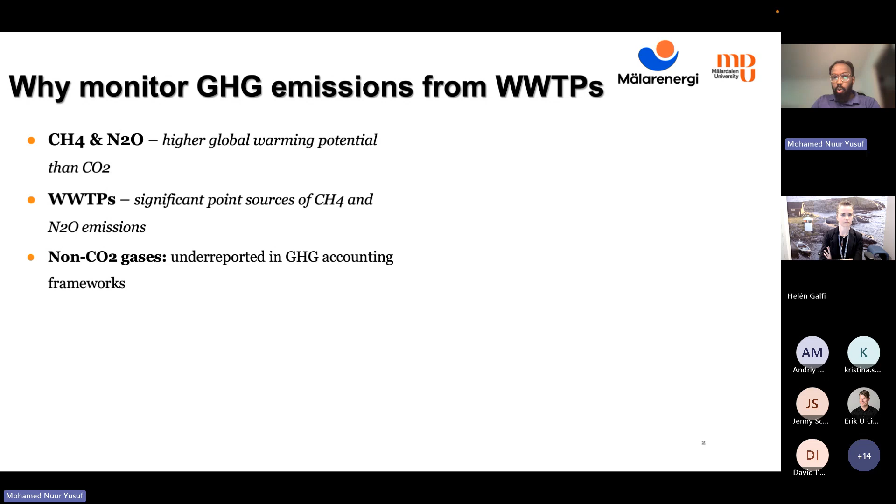And scientific reports show that wastewater treatment plants are significant point sources of these gases. And we also see that non-CO2 gases are underreported when it comes to scientific reports showing emissions of those gases in WWTPs. So reports also show that there's limited long-term measurement data available for WWTPs, and especially for Sweden, we see that methane and mostly nitrous oxide is not reported in the reportings, basically.

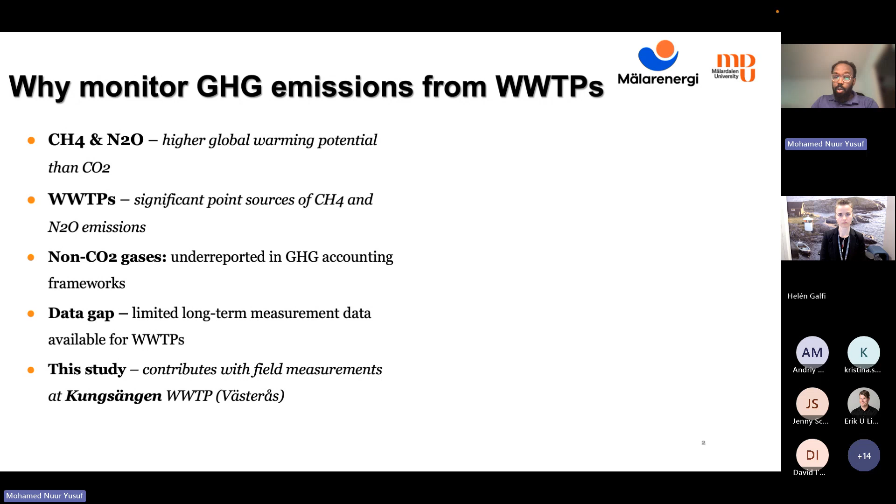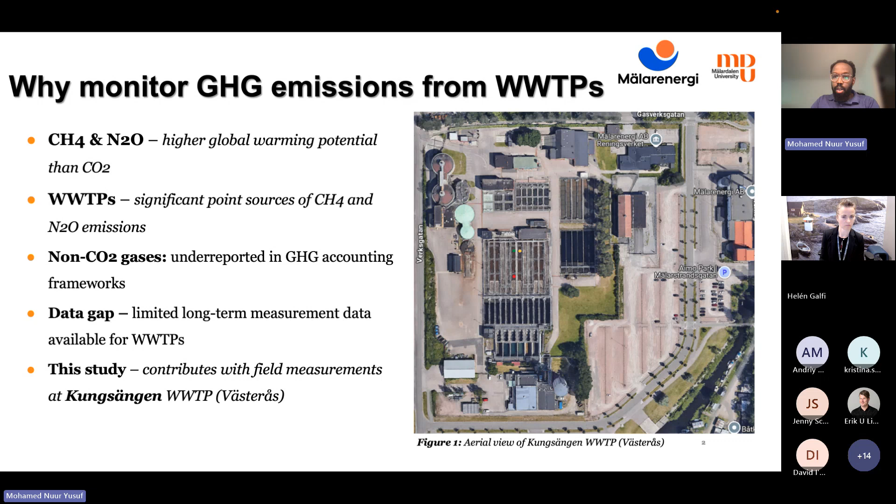So this study only focuses on Kungsängen WWTP here in Västerås. And this picture shows an aerial view of the field. Very hard to see in the picture, but there are some points that I colored here in red and green and yellow. These are the points where I measured the gas concentrations in my study. I will show a better picture later on.

So some of the measurement challenges included that we had an open air measurement, and this meant that it was sensitive to wind and rainfall. So for example, when there's a lot of wind, the measurement thing that we used would start going up and down, and there would be fluctuations in the reading data. And rainfall affected the actual analyzer that we were using, so we could not operate while raining.

There are some challenges when it comes to spatial variability. Different zones generate different emissions, but in this study we only focused on one part of the biological treatment process. There is some temporal variability with fluctuations and seasonal changes, but this study was only conducted during the summer months. And this is to mention, this is only the start of the project. It is planned that it will go on after the summer to see if seasonal changes actually show something.

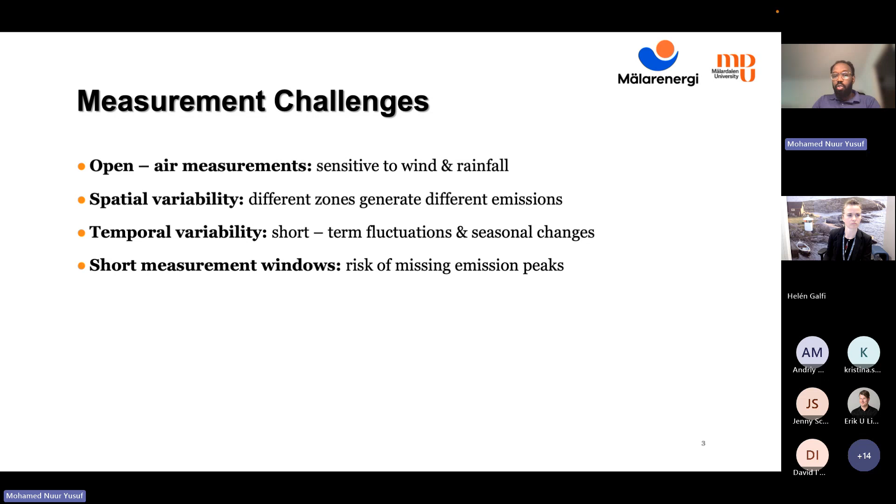So some of the challenges also include risk of missing emission peaks. The measurements that were conducted would only go from 20 minutes to 30 minutes, depending on rain and time availability. But to get the whole picture, it's important that longer measurement windows are conducted to see how peaks perform. And there could be environmental interference, as I mentioned before. There's also operational change, the pool movement, and so on. And currently there is no continuous plant level monitoring.

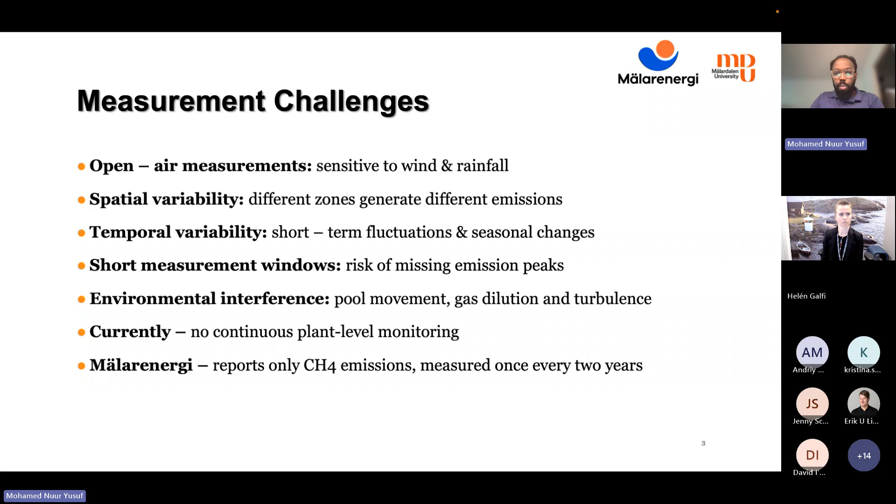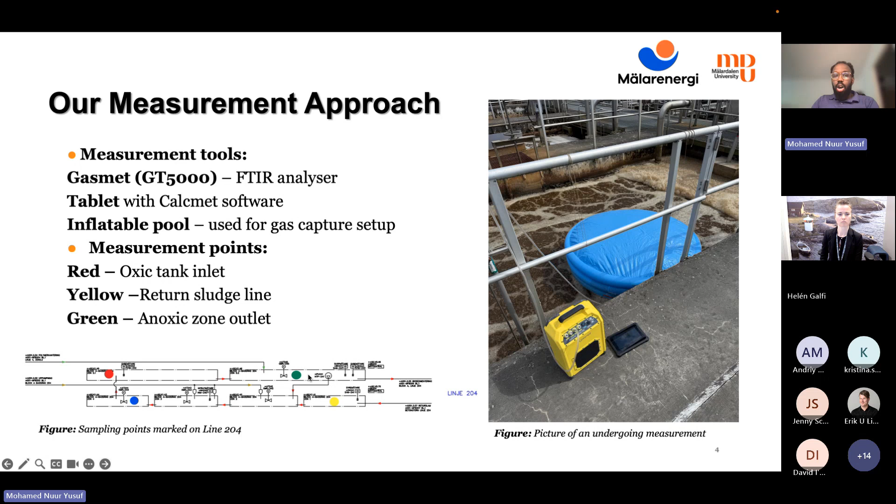So this is our measurement approach. The gas analyzer that we used is called GasMet, and it can analyze multiple gases. For our study, we measured methane and nitrous oxide. On the black screen right there is the tablet that we use to see the data, and the inflatable pool. You can see a tube going into it and into the gas analyzer, and that's how the measurements were done. The measurement points are the red, green and yellow points: oxic tank inlet, return sludge line, and anoxic zone outlet.

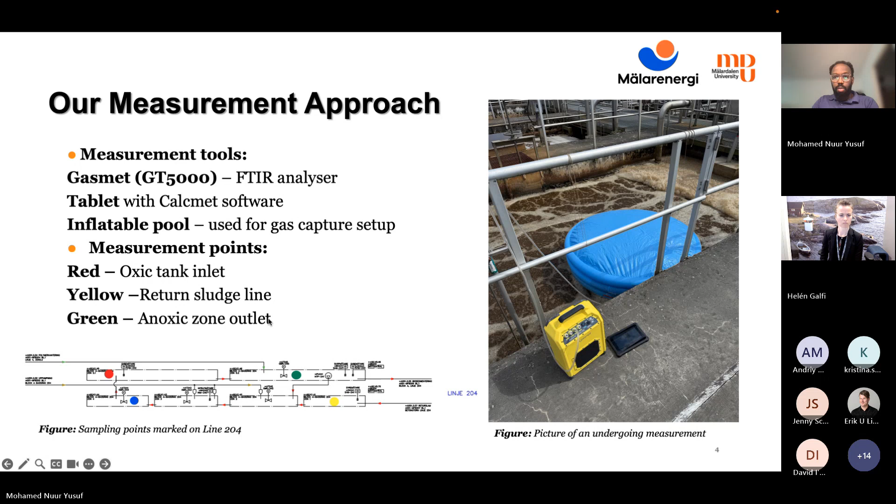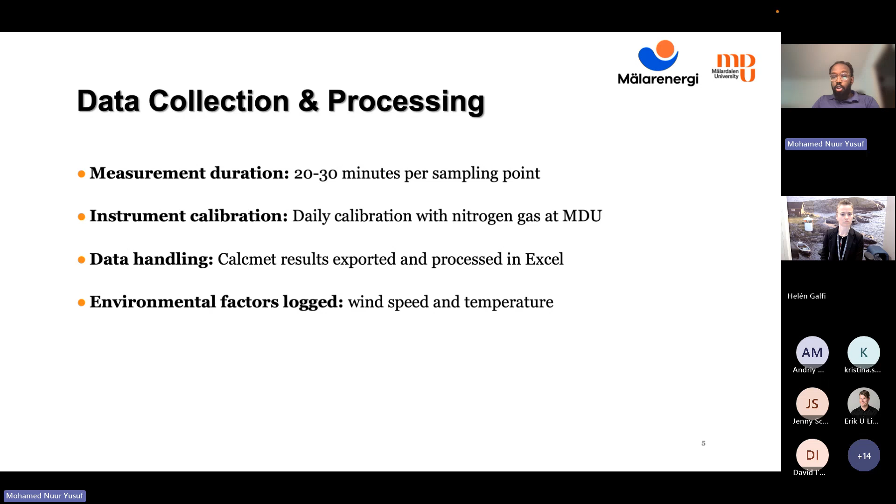If we move on to data collection and processing, the measurement duration was 20 to 30 minutes per sampling point. For the gas analyzer to work properly, it needed to be calibrated by flushing with nitrogen gas at MDU. To deal with the data, CalcMet results data, Excel was used to produce graphs and so on. And environmental factors were logged, wind speed and temperature, to see how these play a role in the data.

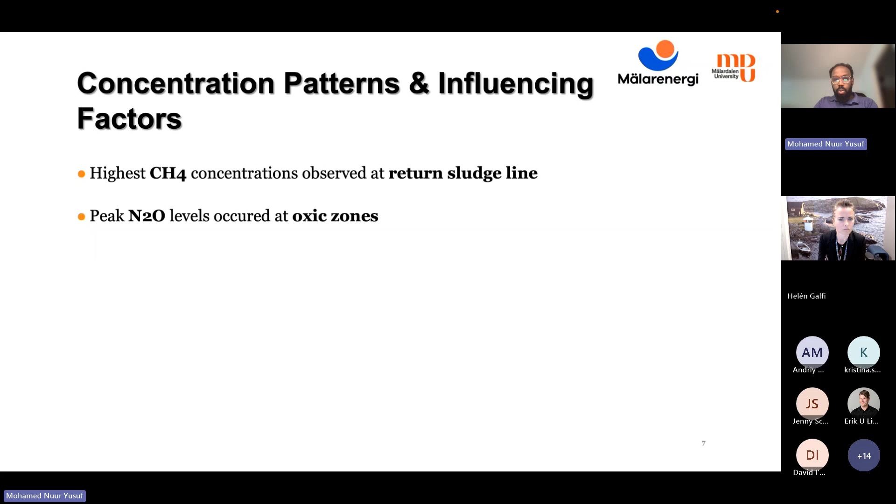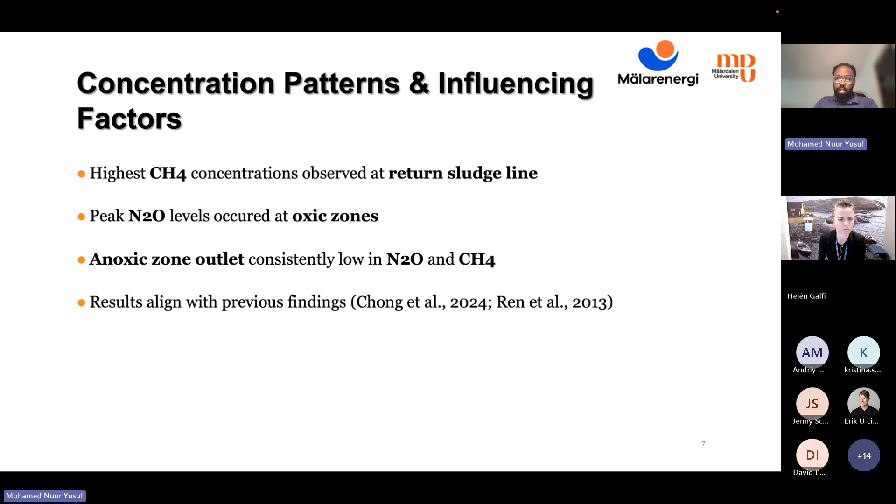So the concentration patterns show that the highest methane concentrations were at the return sludge, and peak nitrous oxide occurred at oxic zones. The anoxic zone outlet consistently showed low methane and nitrous oxide, and these results align with previous findings that showed these results also.

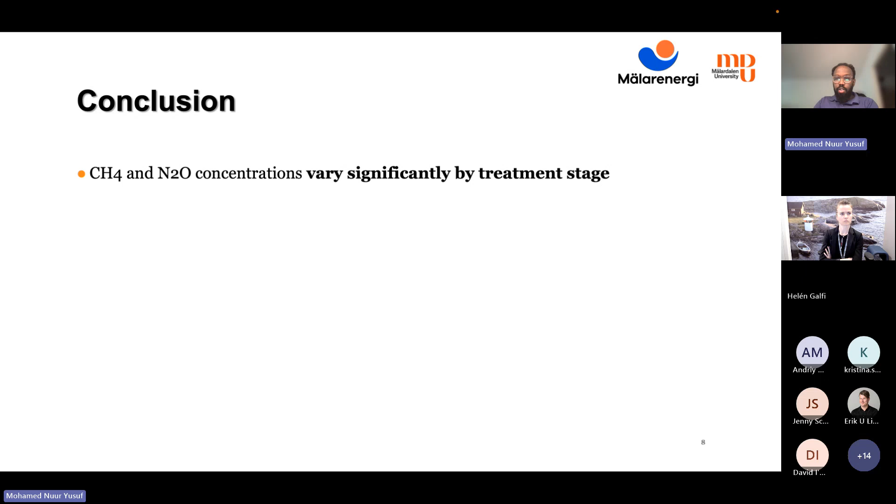So to conclude, methane and nitrous oxide concentrations vary significantly by treatment stage. So it's important to look at all the treatment stages. And we see that return sludge for methane and oxic zone inlet for nitrous oxide, those are major hotspots. When it comes to the return sludge line, it consistently showed lowest emissions.

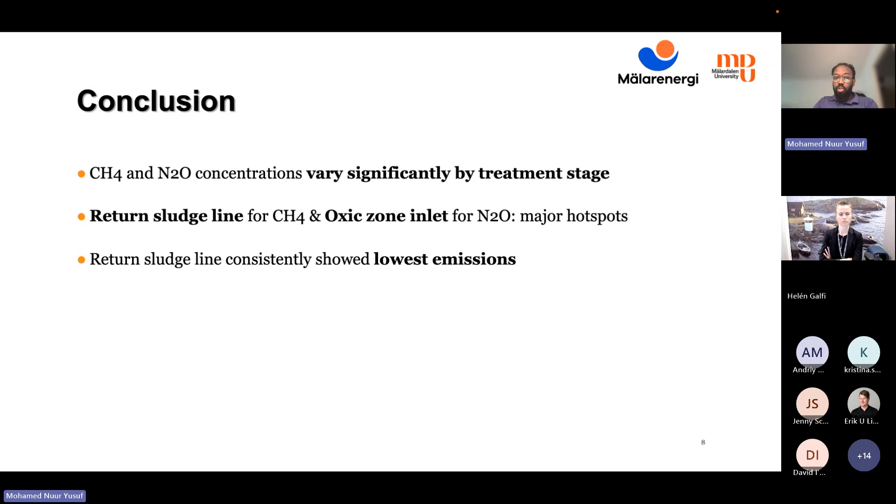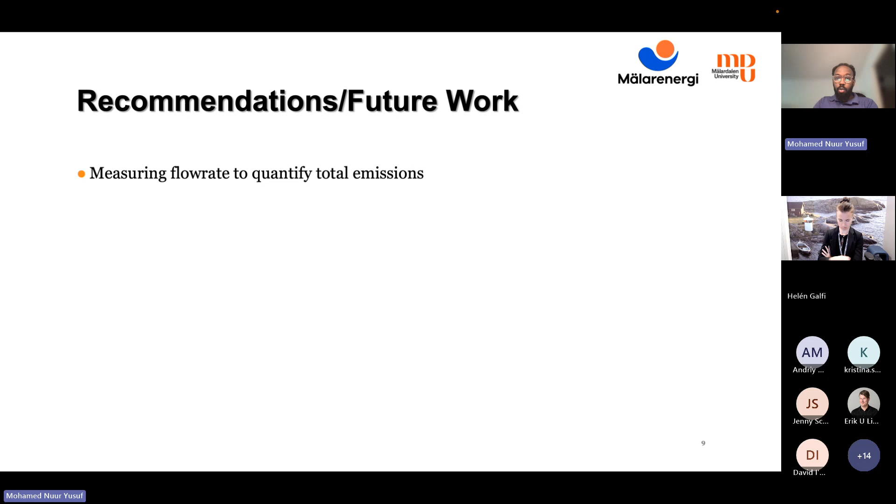So recommendation and future work: measuring flow rate is important to actually quantify the total emissions. The study was only focusing on the concentrations of the gases, but to actually quantify the total emissions, measuring flow rates is important. And conducting continuous monitoring is also important to detect peak events and diurnal patterns.

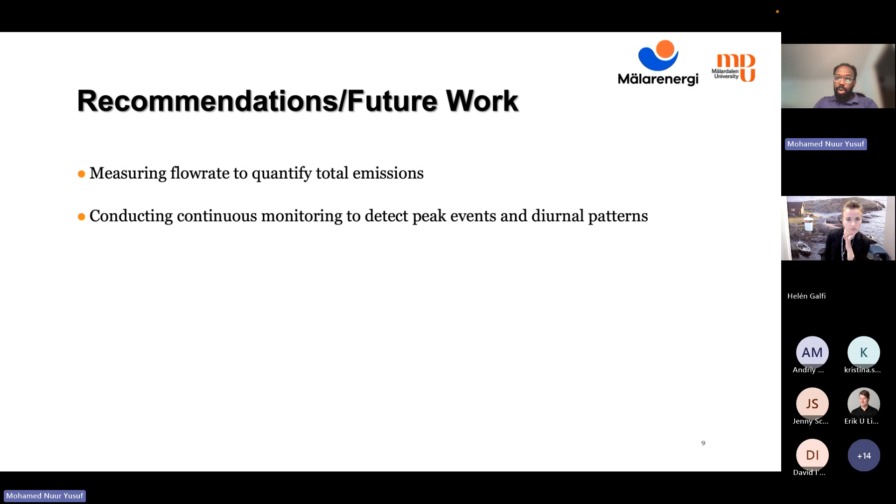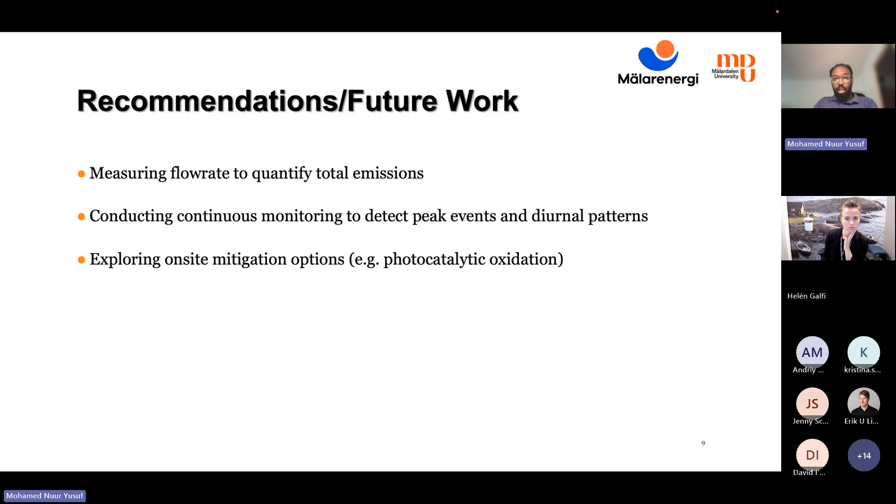Thank you for listening. Thank you, Mohamed. Great work. And if there are any questions, please don't be shy and ask.

One very short question, Mohamed, since I have a bit of a different background, but how about the values that you found, the concentrations of methane and nitrous oxide? What can we compare these values with? Are there any regulations, any guidelines?

So this study was basically only to first see how the gas concentrations for these two gases vary during this biological treatment process. And later on, when we actually know how much of the methane and nitrous oxide is actually emitted, then they could be compared to, for example,

carbon dioxide, where we know that methane is 28 to 29 times stronger than carbon dioxide, while nitrous oxide is up to 300 times stronger. And this is measured over a 100-year period. Okay. Yeah. Good, interesting.

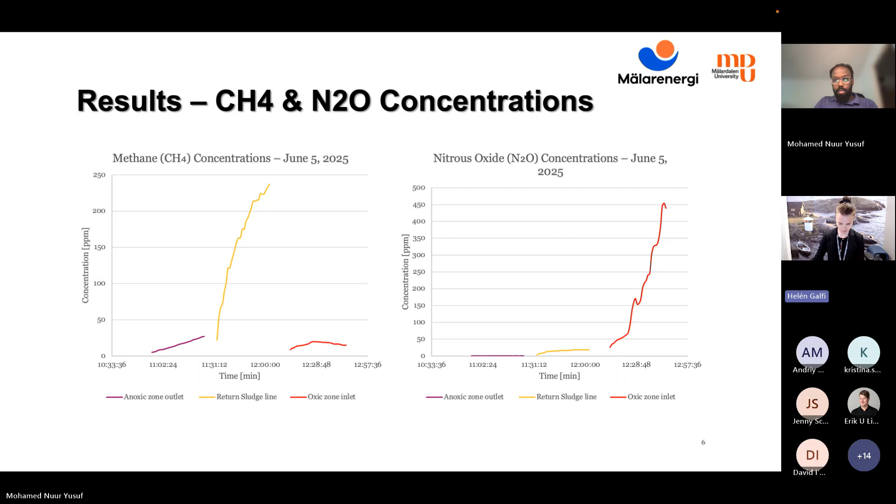Thank you. Please, Dian, prepare your presentation. I can ask something for Mohammed. Absolutely. Thanks, Mohammed. Ulf Jeppsson here.

So you didn't really measure the whole wastewater treatment plant. You measured in the activated sludge part. Yeah. I mean, in terms of methane, we normally have more from the anaerobic digesters and from the sludge deposit, the sludge storage part and so on.

You had one sensor that you had to move around, since you said it was fairly short measuring periods of N2O? Exactly. So this gas analyzer simultaneously measures both methane and nitrous oxide. So when I conduct it on one point, let's say the return sludge, then I would move the gas analyzer and the hood itself to another pool and start new measurements there.

And the duration of the measurement would depend on how the data slows down and I see some kind of steady state. Then I would say, okay, it will just repeat the same values here. But there were some challenges with the hood itself. Sometimes there would be a lot of wind, and it would start moving up and down, so ambient air would come in, and it would show some fluctuations in the readings, basically.

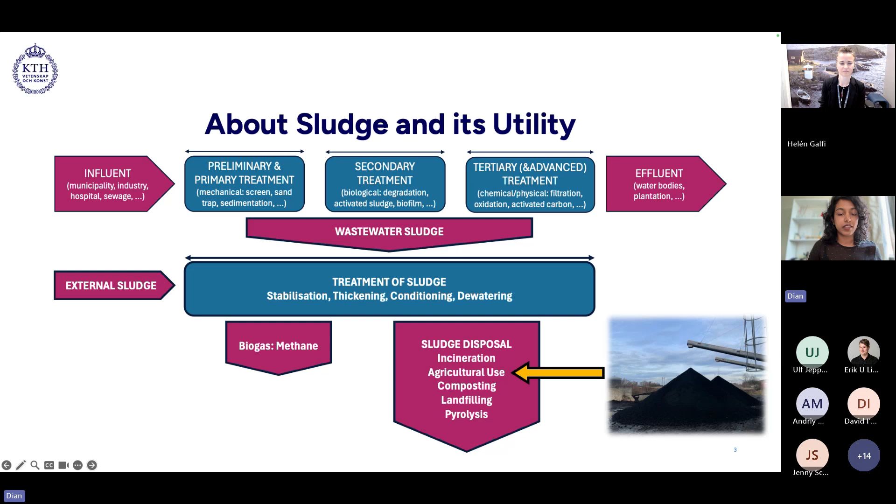Everyone is familiar with the steps in the wastewater treatment process. The sludge that we get from wastewater will be treated, including the external sludge, through mainly 3 processes and will be disposed in different ways. In my thesis, I focus on agricultural use. And here you can see the different sludge samples during different stages. And I will talk about how the microplastics land there.

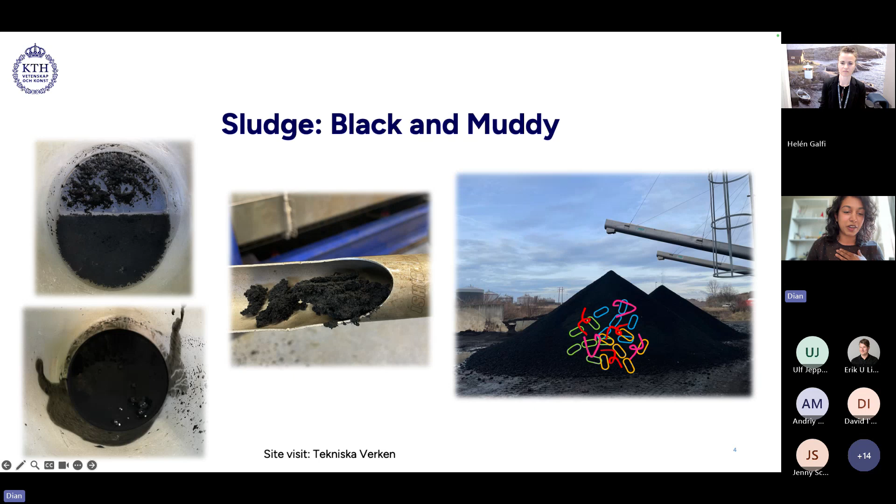So my 3 main research questions are to analyze the physical-chemical characteristics of these microplastics found in the sludge samples, to find out the factors that influence the occurrence, and also how much of the sludge is being disposed in the environment. These questions help to understand the fate of the microplastics in sewage sludge, but also to assess the amount of the disposal into the environment.

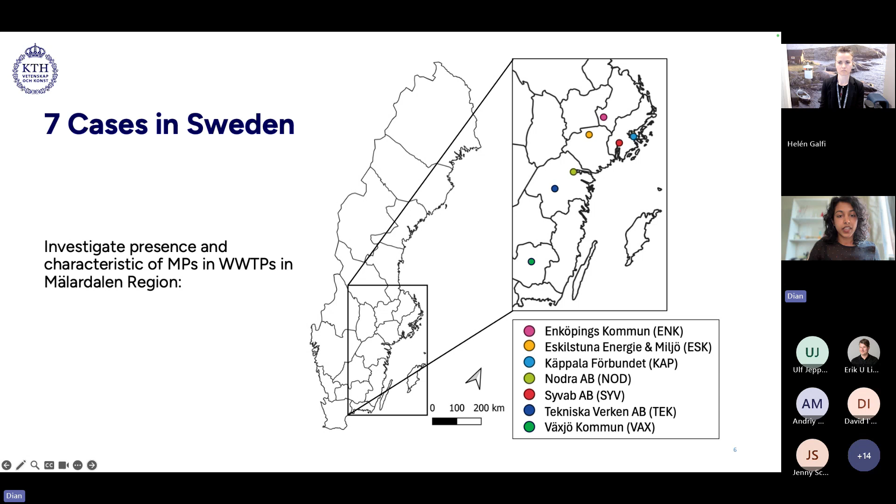I was working with the measurement results from 3 replicates that were received from 7 wastewater treatment plants around the Mälardalen region. The microplastics were extracted from these sludge samples and then used in the FTIR measurements. This gave a spectral fingerprint, which was then compared to the reference spectrum found in the siMPle software. And then my job was to analyze these measurement results.

I made some calculations and analysis, and to complement my results, I also did online interviews with the representatives from the wastewater treatment plants, and also sent them a questionnaire to find out the key figures of the plant.

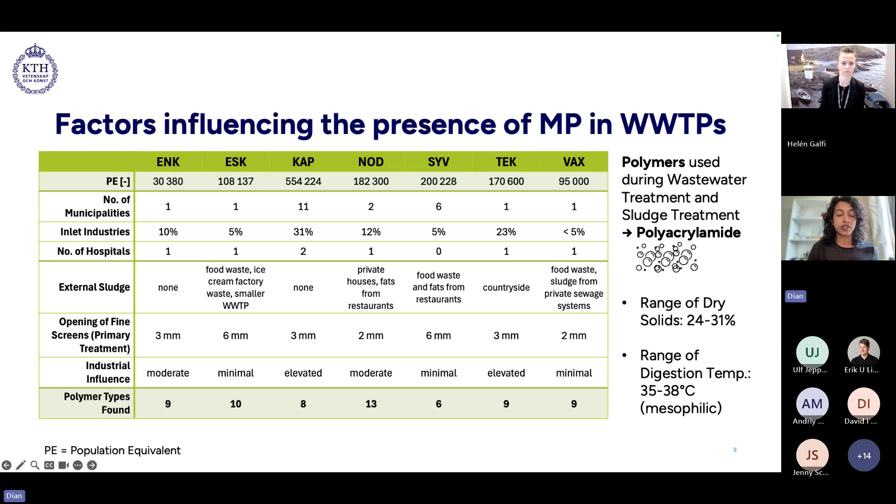And through the questionnaire, it was also confirmed that every plant that was part of the research uses polymers during wastewater treatment, but also polymers called polyacrylamide in the sludge treatment.

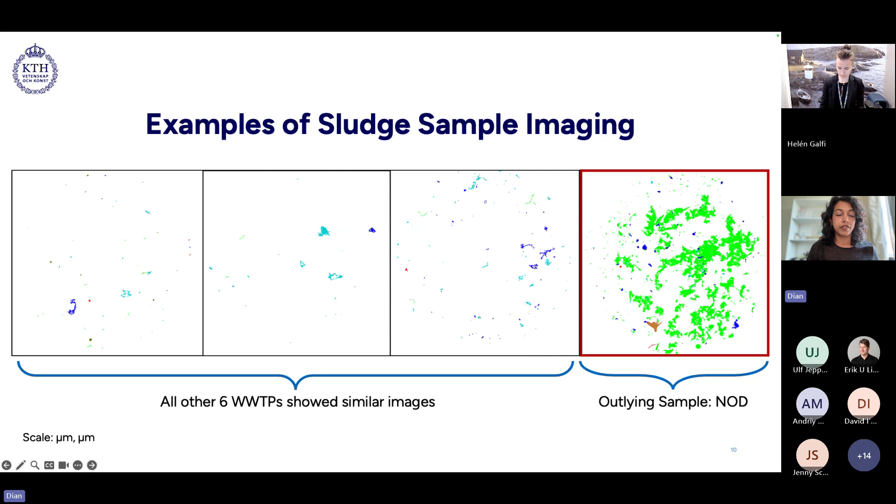Here there are some images from the samples to show how the average samples looked. There was one sample that showed a larger microplastic content and overlapping particles, and this was then considered an outlier and excluded from further comparative analysis between the plants. So now here there are only 6 plants.

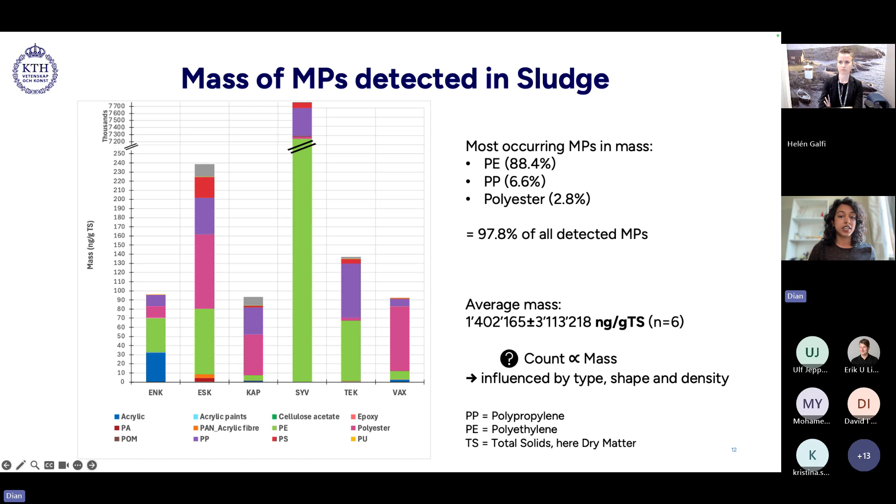And here there is the mass, so nanograms of microplastics per gram of total solids. Here the most occurring microplastics are again the same types, but this time they account for almost 98% of all the detected microplastics. The count is not directly proportional to the mass. This might be influenced by the density, the type, and the shape of the microplastics.

To find out the morphology, three values were calculated: the length-width ratio, the elongation, and the compactness value. And the trend showed that most of the plastics that were found are fibrous, and the areas were also categorized into 4 categories: very small, small, medium, and large sized. So most of the particles found fall into the medium sized category.

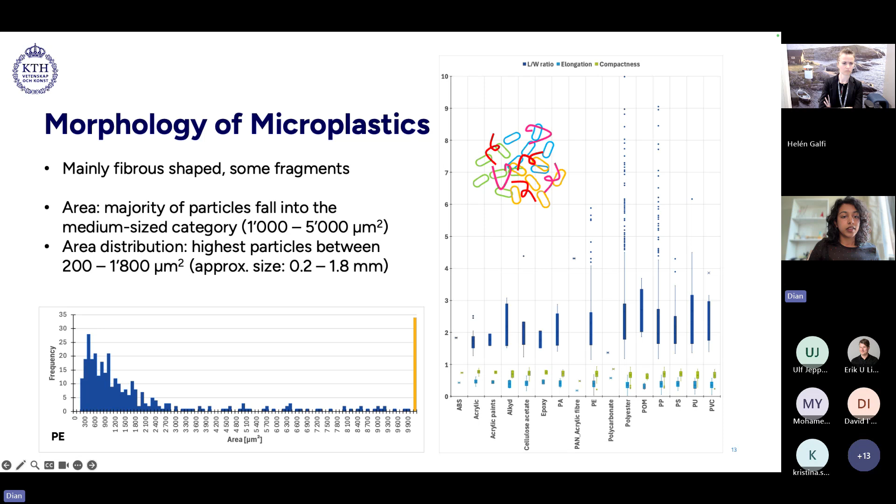Yes, the last step was for me to calculate how much of these microplastics land in the agricultural soil through the sludge used for fertilization. So 5 out of the 7 wastewater treatment plants use it for agricultural purposes. And without including Nodra's results, 14,600 tons of sludge per year goes to the agricultural soil as fertilizer. And this makes up almost 11 tons of microplastic that also go annually into the soil. This accounts for 0.1% of the sludge amount produced yearly.

And the 2 other wastewater treatment plants that don't use it for agricultural purposes use it for construction soil, landfill, and even incineration. To answer my research questions, the most common microplastics found in sludge are polypropylene, polyethylene, and polyester, which are often found in packaging, cosmetic use, and also in the synthetic clothes that we wear.

The average count was about 1,300 microplastics per gram of total solid. Compared to other studies, for example Germany and the United Kingdom, who used a similar extraction method, they show different results. And this shows again how important it is to standardize methodologies for research like this. And also the fine screening in the beginning has shown to filter out larger particles of microplastics in the later stages.

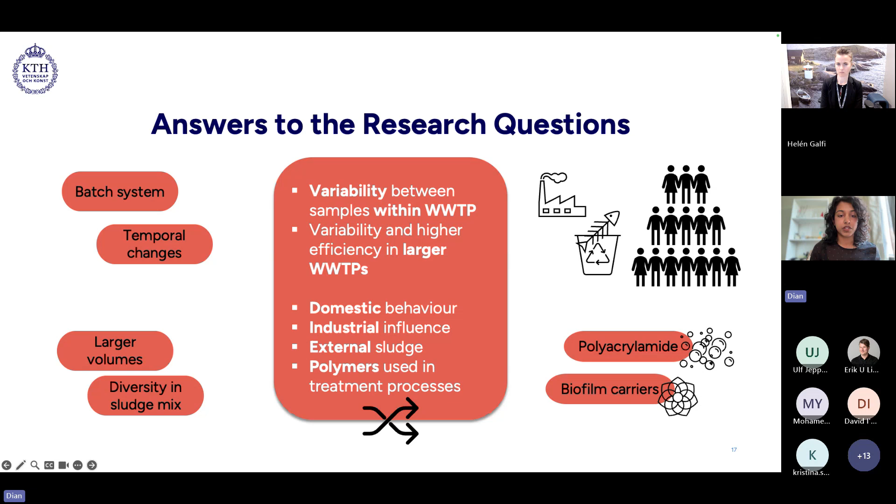There has been variability even between the samples gotten from each plant. This is because of the batch system and the temporal change. And it has also shown that larger wastewater treatment plants who treat larger volumes have a much better removal efficiency of the microplastics. The 4 factors that may influence the abundance are domestic behavior, which is the most major one, followed by industrial influence, external sludge, and the polymers that are used during the treatment process in the treatment plants.

The types of disposal methods are landfilling, incineration, construction soil, and the most common one, agricultural fertilizing. And this is a common practice because the European Union encourages reusing the sludge as fertilizer. And the results show that almost 11 tons of microplastics land in the agricultural soil just from the 4 treatment plants, which makes us reconsider certifications such as REVAQ, for example, to include a limit of microplastic load or microplastic content that should be found in the sludge.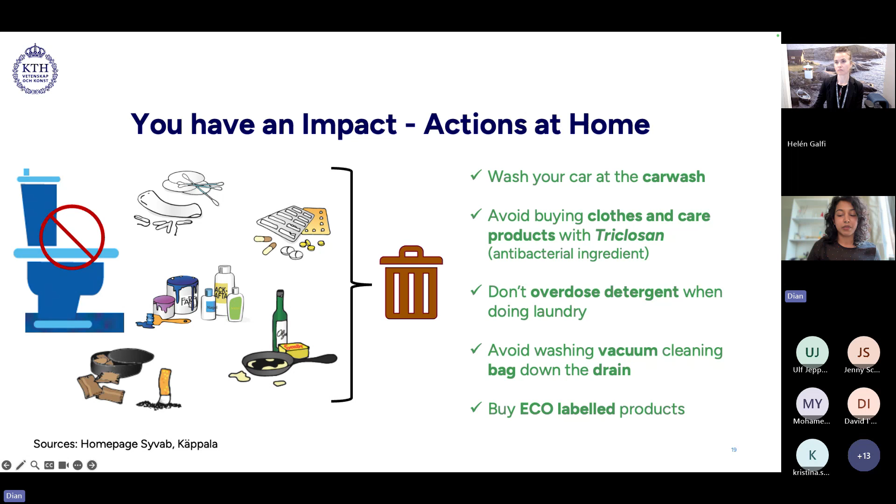Once the microplastics land in the soil, they can be transported by wind, water, and even plowing from tractors, so through agricultural activities. And from the soil, they land in beverages and food and may cause health risks. Before I conclude, there are some things that each of us can do at home, or good practices that we can take with us. I'm not going to go much into details.